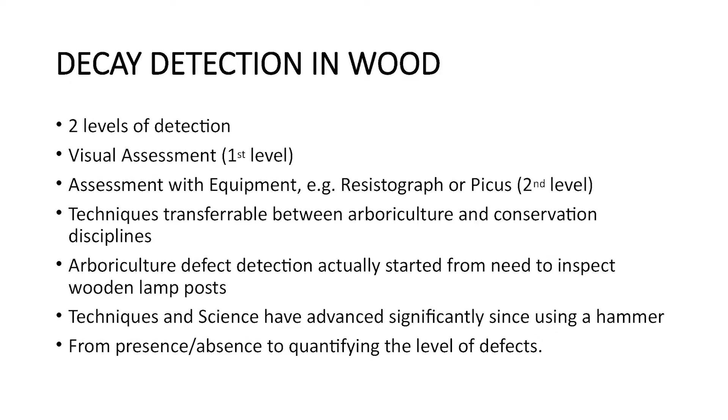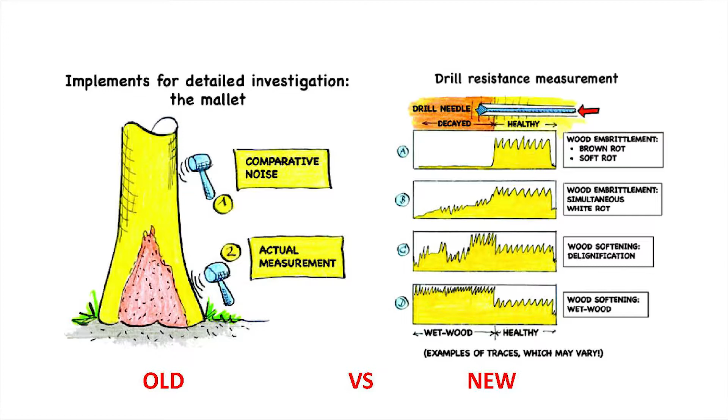Okay, visual tree assessment. If I were to go through visual tree assessment, it would be a two to three day course, but I'll truncate it to the basic level for you guys in about five minutes. In the year 2000, when I was first hired by the National Parks Board, they hired me before I graduated, and they were pushing for arboriculture work. But when they sent me out to the field, there were only a few things I was looking out for: open cavity, termite tracks, cracks, and that's it. There wasn't any real science to it. Nobody taught me what kind of decay, what kind of structure we are looking at, whether a crack is dangerous or can be mitigated.

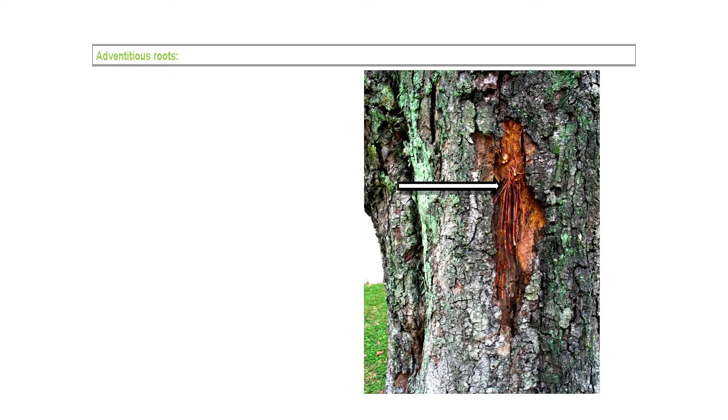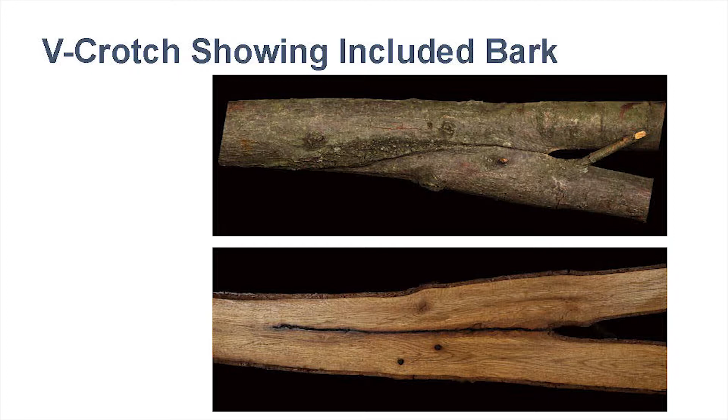So the advantage of the resistograph, first, it has the ability to confirm the internal decay for you. Remember the picture of the fungal fruiting body? We know there's a decay inside, but we want to confirm it. So with that machine, the resistograph, we can confirm the decay, okay? And with that machine also, we can evaluate the size of the decay. I think I've got a slide to tell you what's the failure criteria for trees, how much decay before we fail the tree.

Then you can also determine whether this decay is propagating or not. Okay, if you have just a small decay and the decay is not propagating, then you're fine. But if you have a small decay and that decay is propagating, then you may have to do a prognosis on how long more you can retain that piece of wood or the tree before decay becomes significant enough to impair the wood structure to predictable failure.

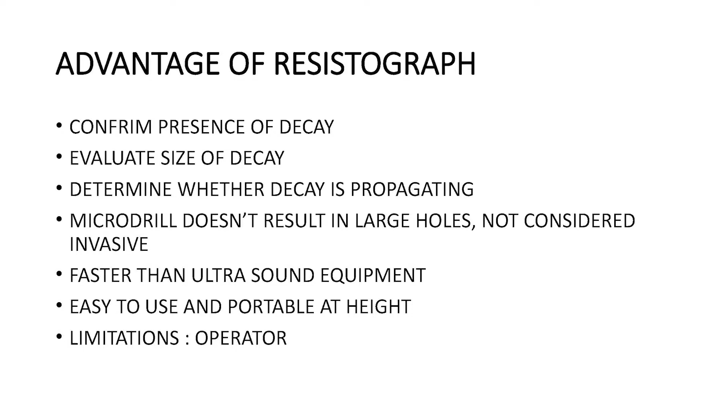IML, from the manufacturer, says one needle can do 100 to 150 drills. Okay, but this equipment was designed and made in temperate countries. And do we have harder wood in the tropics? We have much harder wood in the tropics. Okay,

this equipment was made by a German professor called Claus Mattheck. Many years ago, when he came to Singapore, he brought his equipment to teach us how to use it on trees. And we were quite mischievous. We brought him to the hardest wood we had, which is actually, do you know the hardest wood we have locally? One of the hardest woods? Close. Tembusu, there's another one.

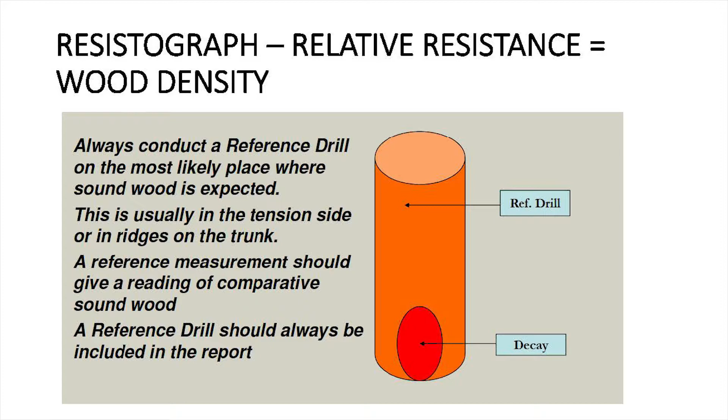But anyway, we brought him to a casuarina tree. So when he started to drill, he broke three needles. So he told us it has never happened to him before. Then we told him, welcome to the tropics. Yeah, but we couldn't let him continue breaking his needles, right? Or else he won't be able to teach us anything. So anyway, he was nice enough.

After that, he went back and did an S version, PD with the S version. He calls it the Singapore version. It's a version with a lot of lower gears so that he can drill through our wood. So although the needle is very small, the shaft length is very long. It's 400 mm, which means that when it's drilling into wood, because it's in such close proximity, you have something called shaft resistance. I'll let you see that later.

So literally, you see this? The needle goes in, pushes the wood aside. When it exits, you pull back the wood and then clog the hole it created. And as you also see, as the shaft goes in, this whole area is surface area for friction. So a certain amount of shaft resistance will be seen in your reading. It's also very important to have your edges sharp. Anytime the needle goes blunt, you have to change it, or else your reading will be inaccurate. One needle is about $80. So in the tropics, we at best do 20 drills, 30 drills, not 100 or 150.

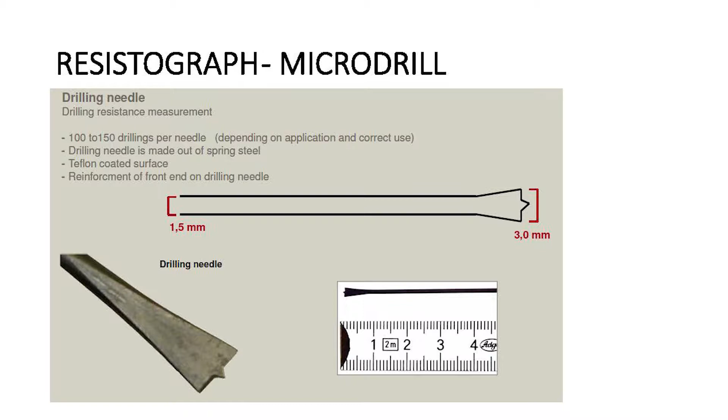Okay, where to drill? For trees, it's a bit more complicated. We'll have to decide where the decay is, between buttress roots and whatnot. But for conservation projects, what do we have? We have circular columns, right? So I don't have to go through this process so much. I'll just drill at the point, or I'll just evenly distribute the drills.

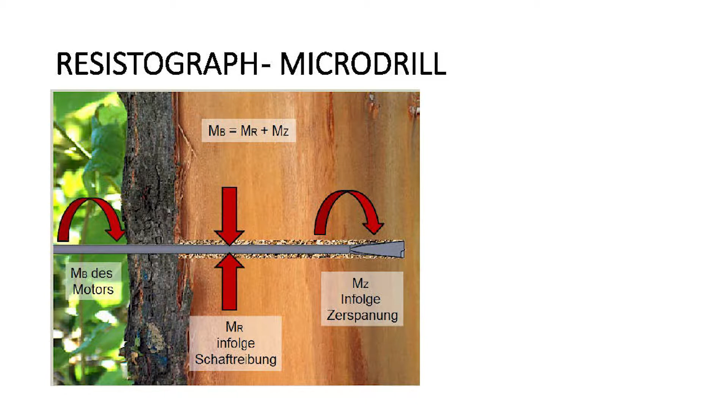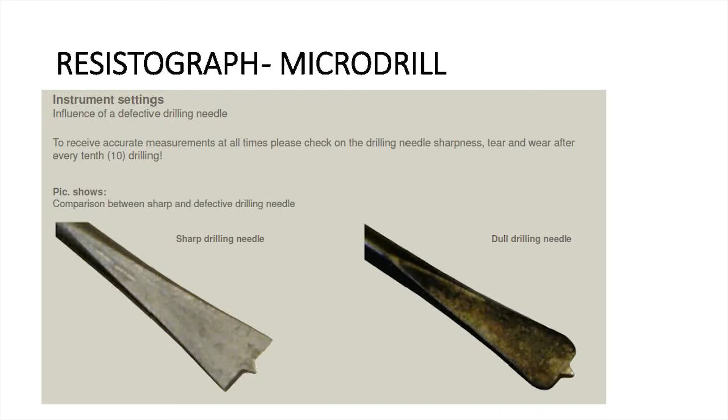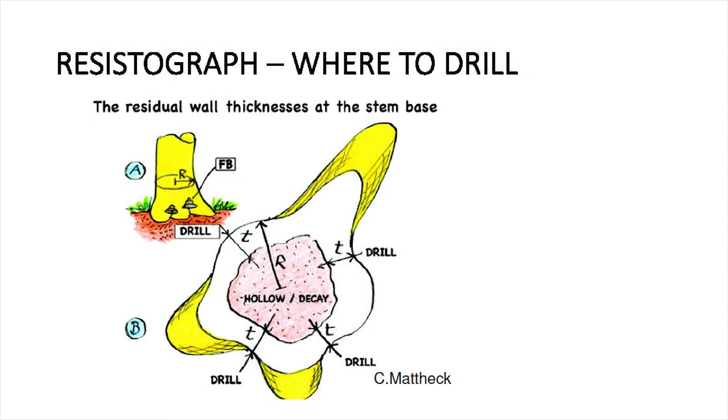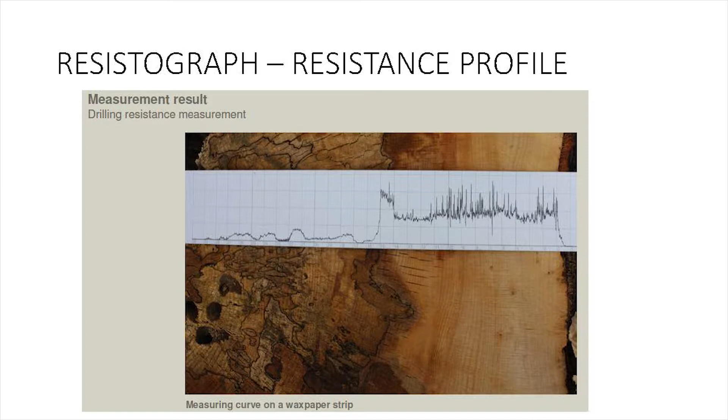In the resistograph, there are two curves, the drill curve and the feed curve. The feed curve is actually more important than the drill curve. The difference between the drill curve and the feed curve is the shaft resistance I was talking about. The feed curve measures resistance at the tip of the needle. The drill curve measures the whole resistance. So if you take away the tip resistance from the whole needle's resistance, you get the shaft resistance only. But in terms of assessment, the resistance offered by the tip, which is the feed curve, is the most important.

This is the profile of intact wood. Again, the blue one is the feed curve, resistance at the tip of the needle. The green one is the resistance of the whole needle. You'll see that as it enters the sapwood, it climbs to the heartwood. This is the level of wood density, and there are no dips in the profile, which means the wood is in uniform structure. It means no defects.

This is tree and this is palm. You see the palm is very different. Palm is a monocot. So internally it's not dead material, it's actually live material. It's actually very, it's just made out of water, okay? Which is the reason why the profile is like this.

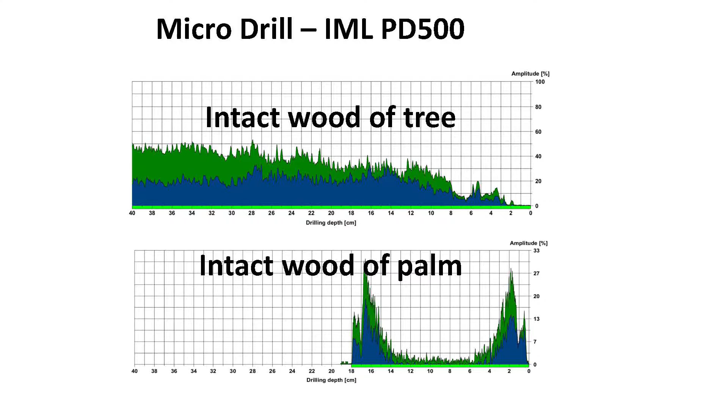If this profile is seen in a tree, the tree has to be cut, okay? But in palms, this is the profile. And it's also a reason why we cannot use the resistograph reliably on palm materials. I don't know whether you all got projects where coconuts are used as structure, but the resistograph will not be effective here.

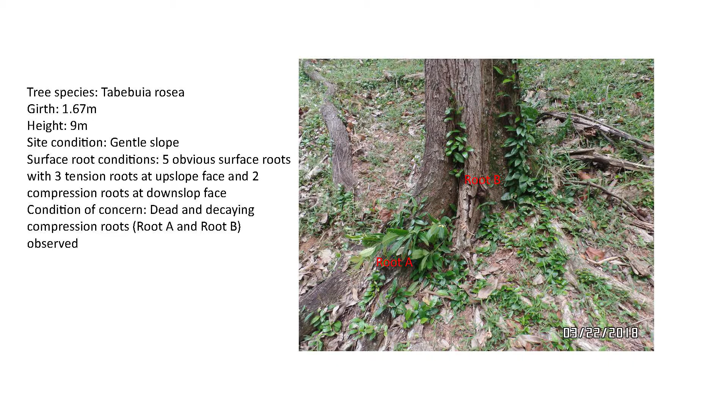Okay, so example of how we do tree assessment. So we do a visual, and from the visual assessment there are two roots that we think are an issue. So we start to drill all of them. And you notice, root 5, which is R5, it looks quite okay from a layman's perspective. But if you do the resistograph, there is no resistance. Means this section of the root is totally decayed. Similarly for root 4, it doesn't look that bad, but it's also decayed.

When you have this kind of structure, it's called floating wood. It's a very degraded wood. It's there, offers a bit of resistance, but it's not connected to the rest of the wood. This floating wood has no structural integrity also. Okay, we see this a lot in old structural columns in conservation buildings that are degraded.

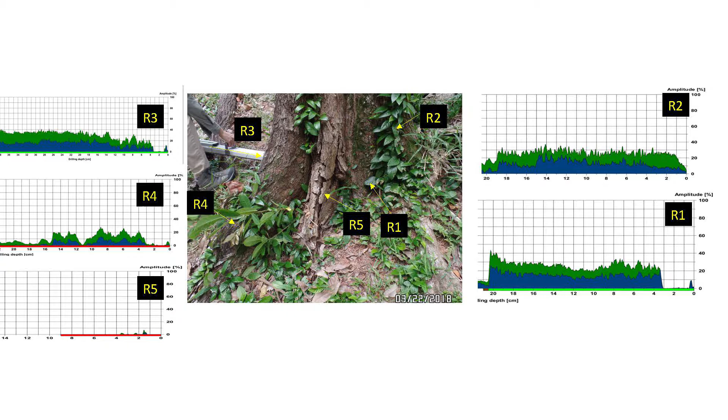Remember I told you there's a relative measure of resistance. Okay, the healthy wood is at 20. But you notice that the decayed wood is at under 10. So this material is already more than 50% compromised. Okay with this? Again, once there's a dip, it's this empty space.

So 3 things about resistograph. Presence of decay, size of decay. So there's a decay, so presence of decay is there. Size of decay, this section here is decayed, so you can approximate the size of decay. And the last part is whether decay is propagating or not.

When you have a sharp drop like this, this is a wall, an internal wall formed by the wood itself to prevent decay from expanding. So if there's a decay and I see that there's a sharp drop right before the decay, this is actually a good thing. It's the lesser of 2 evils. It means that the tree is doing something to prevent the decay from propagating.

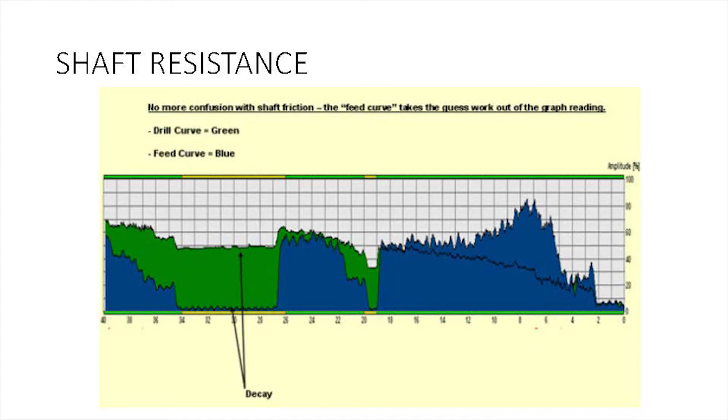But if the profile is gradual, it tells me the decay is still propagating. So in this profile, one side of the tree has successfully blocked the decay. The other side of the tree, as it goes in, the tree hasn't managed to stop it. Okay, so this is not good.

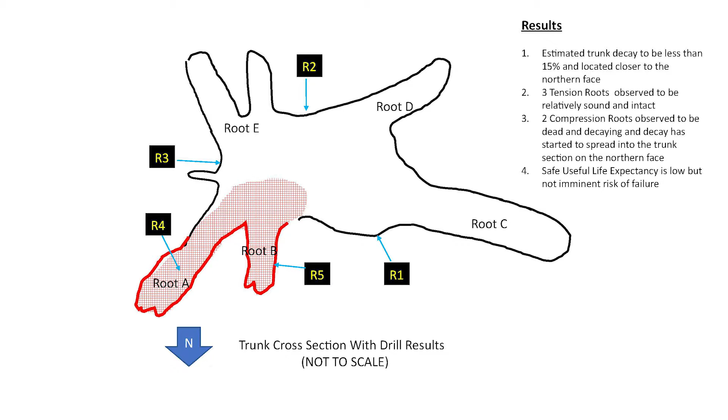But in conservation projects, because there's dead material, you won't get natural blockage. In conservation projects, when I see this dip here, it's a crack or a slot or something that was manually done for a joint. So after the assessment, after you compile all these data, you can do a rough sketch of where the decay happened.

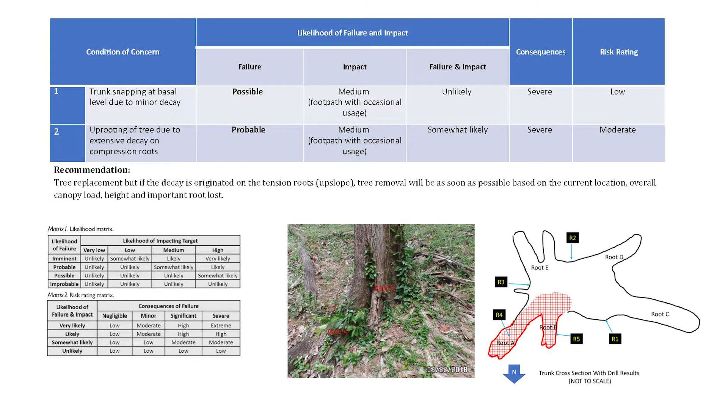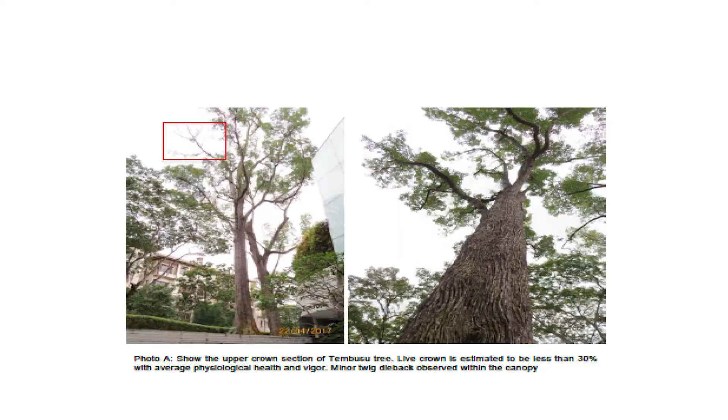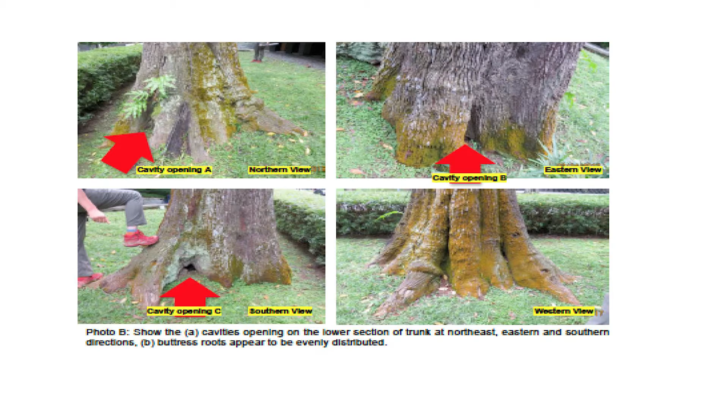Okay, next case. This is a large tembusu tree in one of my client's house. We've been looking at this tree for 6 years, but it's only last year when we went that the wood material here actually broke off. It's just a small crack here that broke off, and when we went around, we found another area of discoloration, then we decided to drill. When we started to drill the tree, this is the size of the decay within. So it's largely empty inside. It's only supported by the roots.

And this size of decay doesn't happen overnight. It probably took 20, 30 years to develop. The point was that we were on the job for the last 6 years. If the external signs don't tell you, you won't do the resistograph drill. It's only on the 6th year, where a sign appeared, then you do the drill, and then you realize how lucky you were to have spotted this.

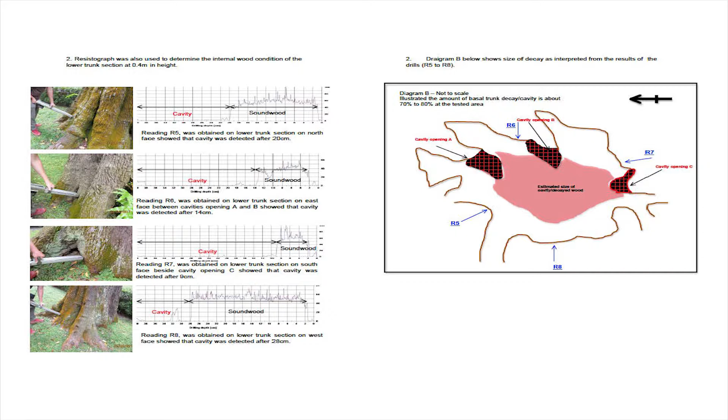So visual indicators, there is a debate now ongoing. This is a tembusu tree, about 2.8 meters in girth. Its growth rate is very small, so 2.8 meters in girth means that it's about 100 odd years old. So this guy has seen through 2 world wars, and we are losing a lot of these trees, which is quite sad.

Okay, so we went through the resistograph, which is the needle drilling micro drill. The next one is the more sophisticated Picus ultrasound, which uses sound to detect decay within wood. So sound requires material. The denser the material, the faster it goes.

If the material is less dense, the sound will take longer to travel from one point to the other. But if it's very dense material, then it travels faster. So it takes advantage of that to decide whether there's decay or not. Largely what happens is that you put multiple sensors around the trunk, and then you start to ping. If you put 8 sensors, you ping one, use the hammer to knock, and the sound will transmit to the other receptors, and then you go around knocking all the receptors.

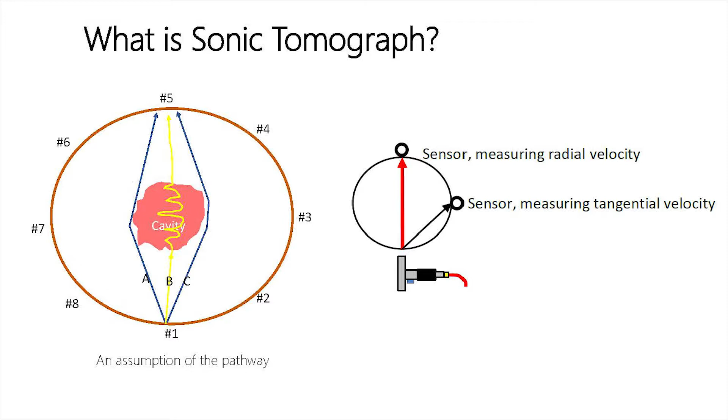So, I think it hung. Wait, okay.

So with all these sensors, you actually have to nail them on the tree. This is still not considered invasive, but I find it more invasive than a resistograph. You've got all the receptors up, you ping one side of it, and the noise will travel around and form a lattice of information. Then you go to the next one and ping again. You repeat this throughout the circumference of the tree.

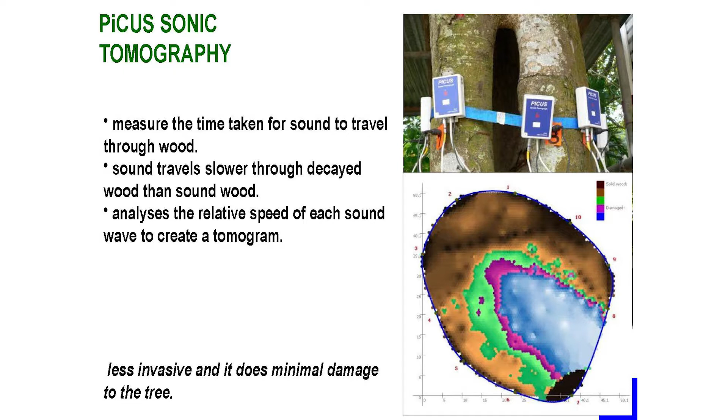Key to this is shape formation, because you need to measure the speed of sound in the wood, and the speed of sound depends on the distance it has to travel. So if you have an odd-shaped tree, you really have to form the shape before the data is accurate, and that takes more time than the actual pinging itself. In tropical trees where you have buttresses, that makes it a very complicated affair.

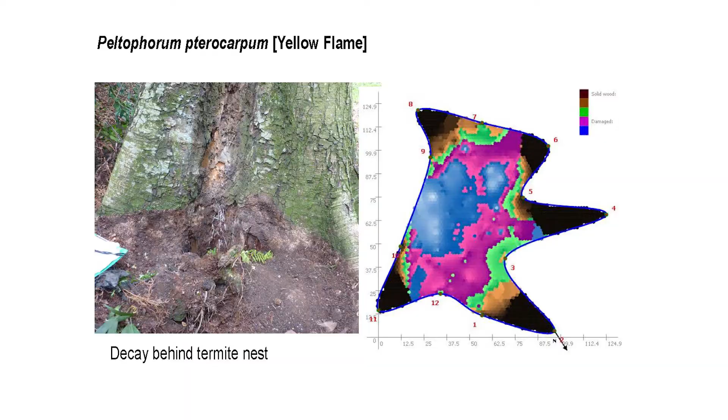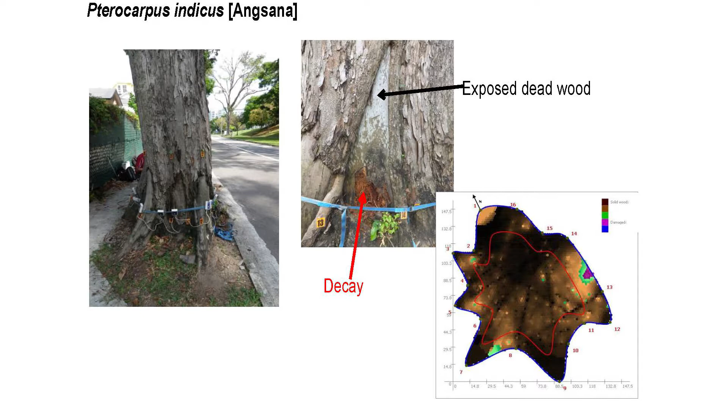But in conservation projects, again you have a circular column. We use this in areas where the column is important and it's very hard to replace the column. Then you can use the PiCUS ultrasound. Similarly, in this one, you don't have a central column decay. What you have is an open door decay: something happened here, and the decay went in. The PiCUS will be able to show this for you, and it's a more sexy equipment because the details are very clear.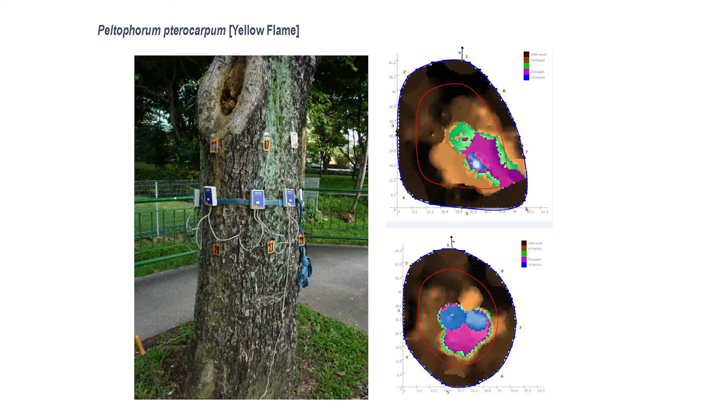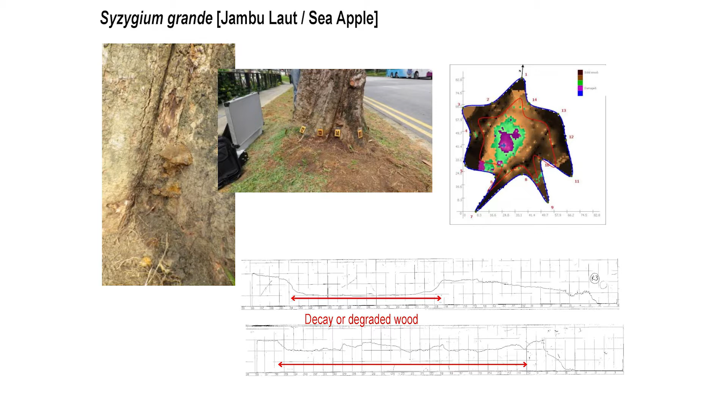You look at the base of this tree, it looks quite bad, which is why I went for a Picus ultrasound, but it shows that wood integrity is largely good, so you can keep this tree. Depending on the size of the tree, you can run up to 24 sensors, and the cables you have to manage are quite messy. Again, the Picus is only used for trees of very high value, because it takes more time, and cost-wise it's a minimum of three times what a resistograph costs.

Even if you have done your Picus right, in terms of operating procedures you will still double check the Picus data with a resistograph drill. So at the end of the day, in terms of time, cost, and efficiency, the resistograph still provides the best fit for most situations.

Decay detection in conservation works. This is 150 Telok Ayer Temple. This wood, I don't know whether it's clear, when they section the wood surface, it looks like concrete. I hate to see this in temples because it means the wood is ironwood, Eusideroxylon, the Borneo ironwood. This is very, very hard.

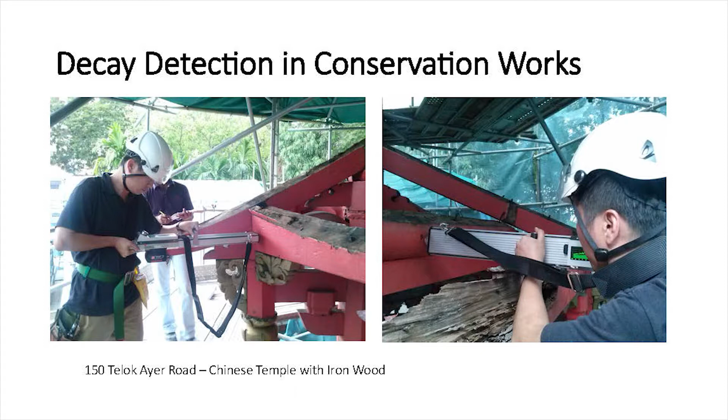I told you my needles last 20 to 30 drills. If I hit this, it's about 8, and I have to change needles already, if I'm lucky. And when you drill in, because the wood density is so high, the whole needle will smoke. Because the equipment is small enough, in areas with tight constraints we can deploy this. This is about 200 years old.

Yeah, so this is on the top of the roof, you know. So this was exposed to weather elements, you know. And after 200 years or close to 200 years, you see the wood is still very good quality. So ironwood is one of the best.

In Mulu National Park in Sarawak, right, as a kid, I went to the national park. I went to a cave, and then there's a hole in the cave, and the ironwood has dropped down onto the floor of the cave. And then because there's a hole on top, right, the ironwood, the dead wood is highlighted by the light.

20 years later, I went back to the same cave, right, to the same spot. The tree is exactly the same. It didn't change at all. So ironwood is one of the toughest wood around. They use it for old construction, but I don't think they use it anymore. Export of the wood is also banned.

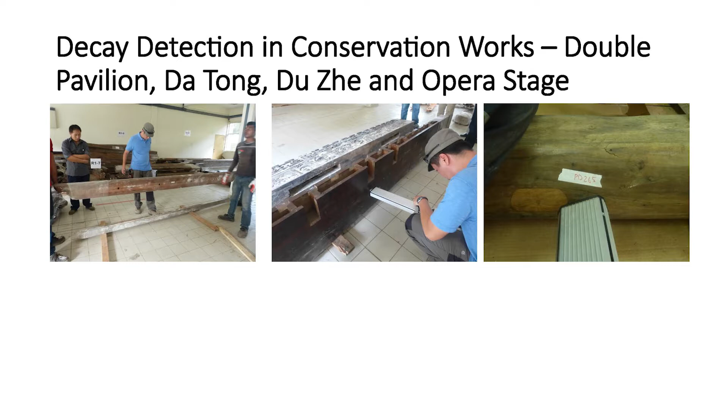See, if you see there's degradation, right? Borer attacks, like these small dots, right? There's borer attacks. So in this location, once you identify it visually already, right, you start to drill. And when you drill, right, you'll find there will be decay. Okay? But some of these, right, it's only superficial discoloration. When you drill inside, it's largely okay.

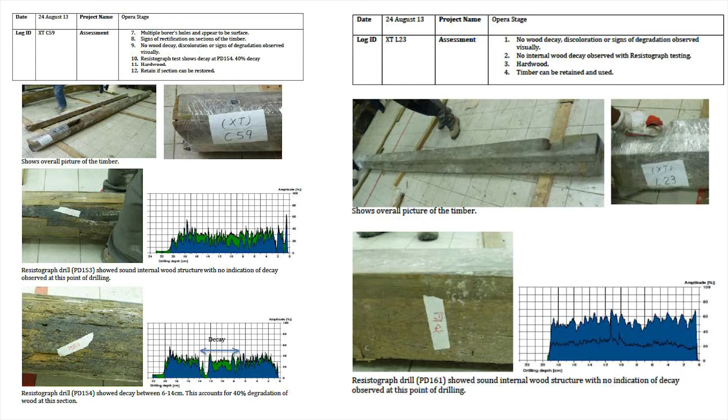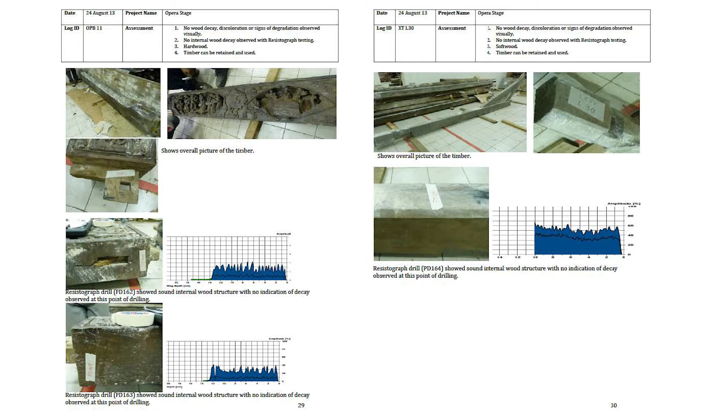These are the structural support. So structural column or wood that are used for structural support, I will expect a higher density. Okay, or at least I'll prefer a higher density. These two are the same material apparently, but you can see this is higher density and there's no defects, right? This doesn't have dips that tells me there's a cavity, but the wood density is way lower than this one. Okay. So to me there's some compromise in the quality of the wood.

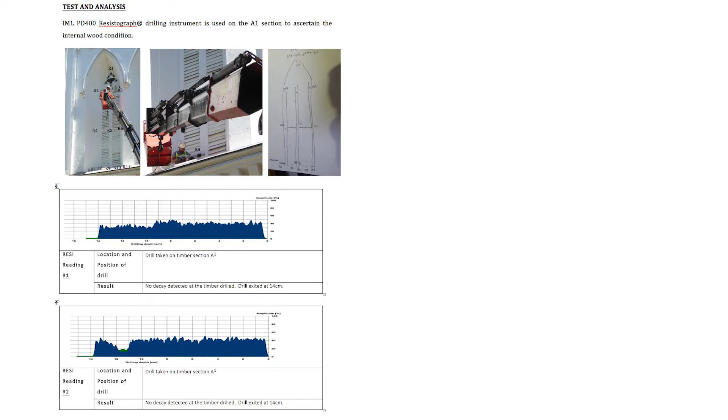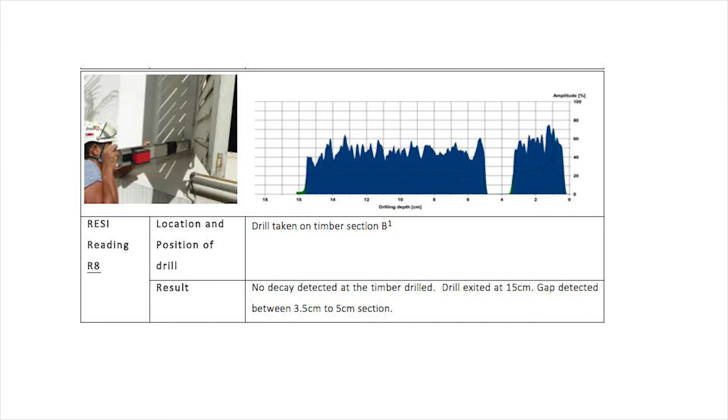Oh, recently we're doing St. Andrew's Cathedral for the window frames. So this is in situ. So you have to go on a crane to start drilling. For these situations, right, we usually aim for areas that we think will have highest dampness. Because the water will come in, right, at a lower point, and then because it's painted, I can't see the discoloration. So we will choose areas like this to sample. Okay.

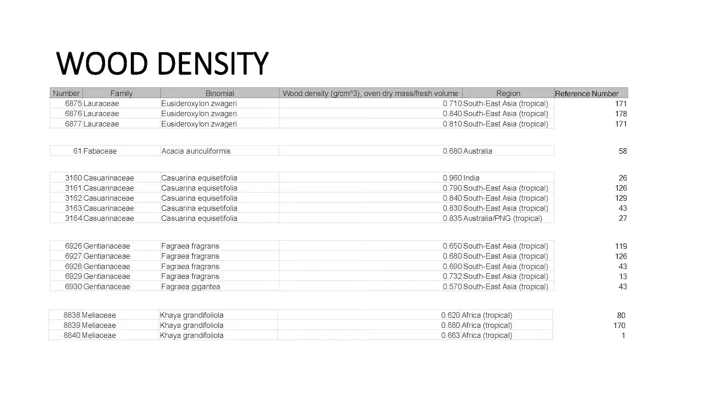Okay, wood density wise, Eusideroxylon. It's the ironwood acacia. This was taken, there's only one reading for auriculiformis that was taken in Australia, 0.68. So for us empirically, right, anything that's above 0.65, right, we say it's hardwood. And we think it's okay for outdoor furniture with little treatment. Because if you have very high wood density, right, whatever treatment you do will not permeate deep. Okay? Anything that's 0.35 and below, we consider them very soft wood.

This is a tembusu, a piece of tembusu left out for 6 years without treatment. Okay? It still looks okay. There's no degradation at all. Okay?

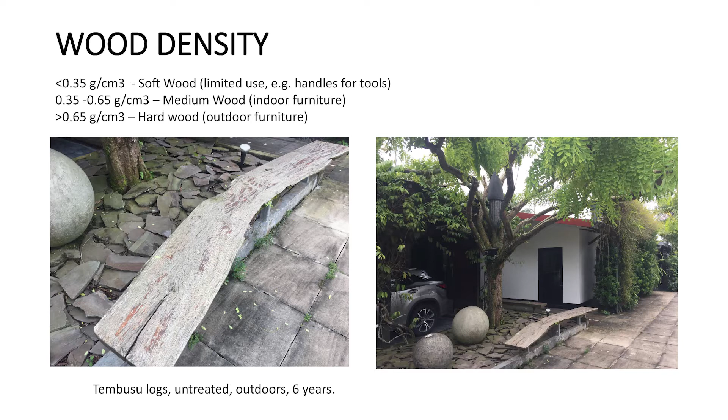So in summary, what happens usually is that we will do a visual tree assessment to look out for wood discoloration, fungal fruiting bodies, termite infestation, and open cavities. Then if we think there's a decay, we'll do second level. It's either with a resistograph or a PiCUS.

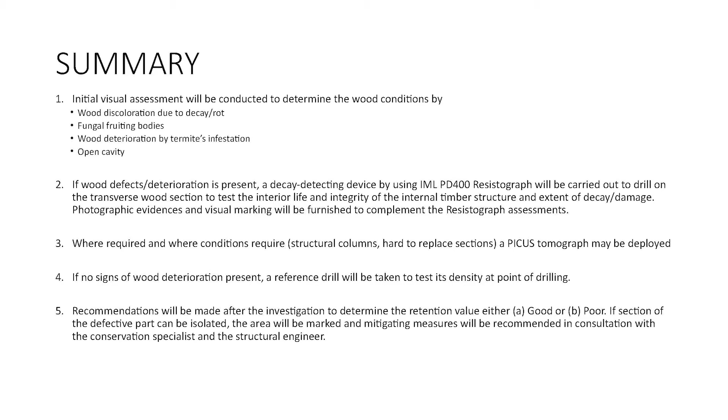Okay. And if there's no signs of degradation, right, and if it's a conservation project, we'll still take a reference drill for the future. So that in the future, if that beam needs to be reassessed again, you have a reference drill. Okay. Then the recommendations we are making, we usually don't make it independently unless it's really, really bad. But we will make it in consultation with the conservation specialist and the structural engineer.